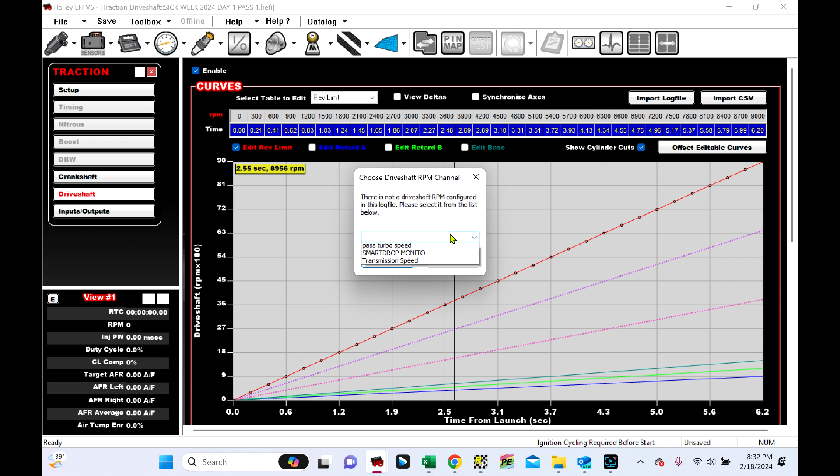Okay, go back to drive shaft, import log file, click drive shaft speed profile. Okay, now we've got a better usage of our dots.

Okay, so right now you notice the dots are highlighted, little dots here on the rev limit line. If you click up here, edit rev limit, you see the dots go away, come back. Down here is base. So we need to create a base.

So if we come over here and turn it from a pointer to a little finger, right click, and you can hit copy to base. Now I'm going to zoom in using the mouse wheel, and you see we've got little dots. That's your base.

Let's zoom back out. We'll right click, hit offset, offset to retard A. If you copy to retard A, it's just going to put retard A right on top of your base, which may be what you want to do. In this instance, I'm going to show you pretty big windows so you can see the lines easily and understand how this works. So we're going to offset this with Shift plus, let's go 50 RPM ahead.

So what that means is, let's zoom back in. Notice it is all a 50 RPM gap, right? Click edit retard A, notice there's our dot. We've got two dots on top of each other. We can synchronize axes. Now you see we've got dot, dot, dot, dot. There's a 50 RPM spread between the two of them.

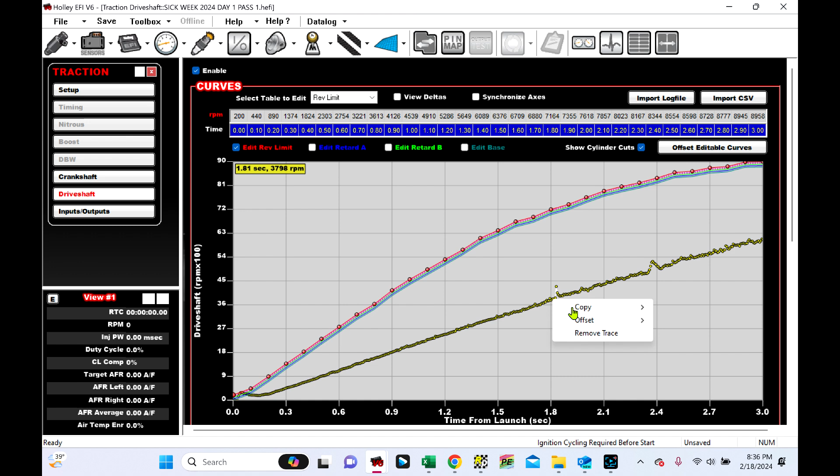Drive shaft. Now let's go import log file. Drive shaft speed profile. There we go. All right, now watch what happens. Copy this to the base. Right click, offset, retard A, Shift plus 50. Gives us a lot more resolution. Right? So it gives it a lot more resolution.

Notice we've got a lot more dots to play with in a shorter period of time. It doesn't matter how you do it, but just understand how this works. If we want to, we can right click and hit offset retard B.

We'll go shift plus 100. And then we can offset rev limiter, shift plus 200. There we go. So it's up to you how tight you want to keep these windows. Make your decisions wisely. Now we've got a lot closer dot spreads, so we can tune that in a little bit tighter if we want to.

Now let's look at what retard A and retard B do. So retard A, right now we're editing retard A. Obviously minus 30 degrees in 3 seconds would be stupid. So if this entire line was just minus 5, that means anytime the drive shaft speed goes above the baseline, it will start to remove timing as we approach this blue line. As we get to this blue line, it'll have 5 degrees out of it. Obviously, that's a pretty blanket, easy, dumb way to do things.

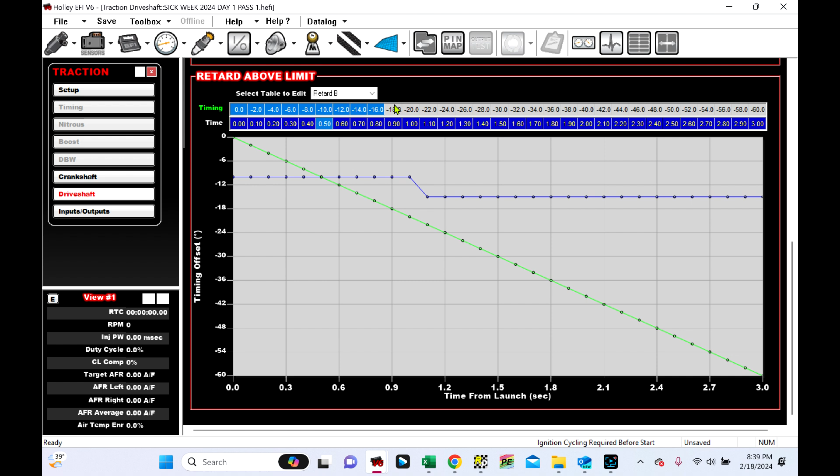So what we can do is we're in retard A still, and we can do this easily. We can copy, go to retard B, left click, hold, drag, highlight, right click and hit paste. Now they're doing the same exact thing. Now what we can do is offset selected and go minus 5, so retard B is going to pull 5 more degrees in the same time frames as retard A. Hopefully that makes sense.

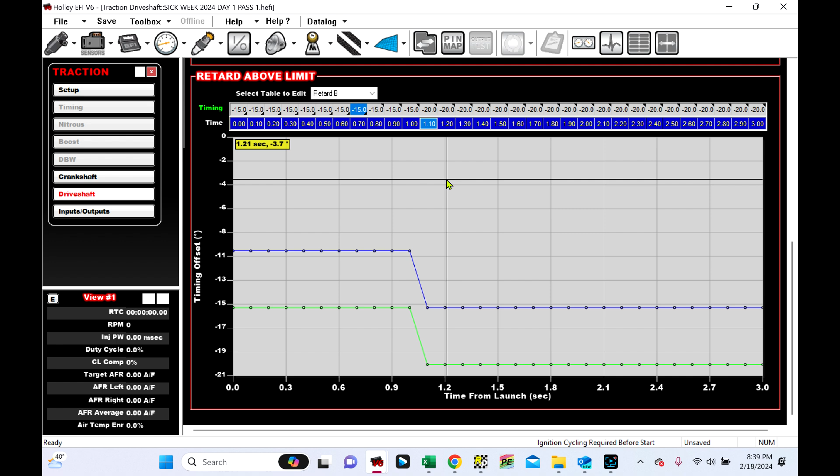That's an easy way to set this up if you're just getting your feet wet with this and not understanding it. Rough and dirty, but it works. So this is how you use Holley's traction control. Some people find it easier than Davis's, some people find it harder than Davis's, but either way, this is how you use it.

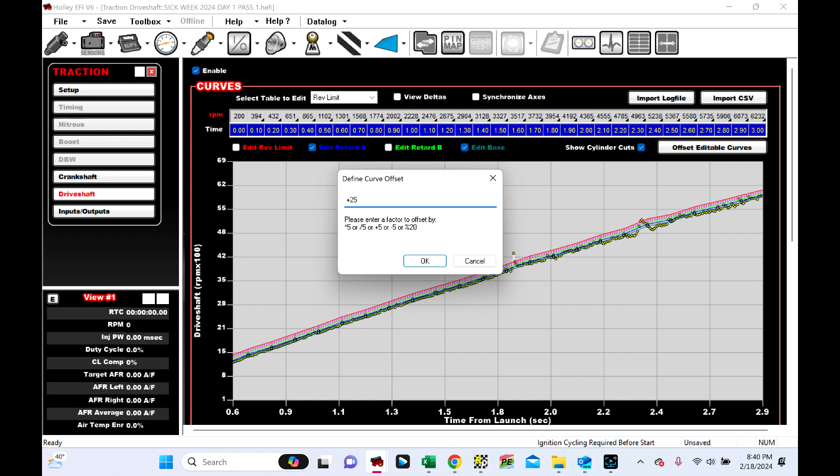Once you save this, it will save, and then you can go over here to offset editable curves and make a wholesale change to the entire thing. So you can say, I want to give it plus, let's say 25 RPM. There we go. And what it did is raise our baseline, see how our baseline's up above it now. So our baseline is up higher than it was, up by 25 RPM. So we can offset it and the whole thing moves, it moves all of them.

There's also a bunch of other options here, like show labels. So if you want to know, look right there, 3152 and 3202. If we go to retard B, it's 3227. If we go to rev limit, it's 3327. So now you can see your spreads real easy right there.

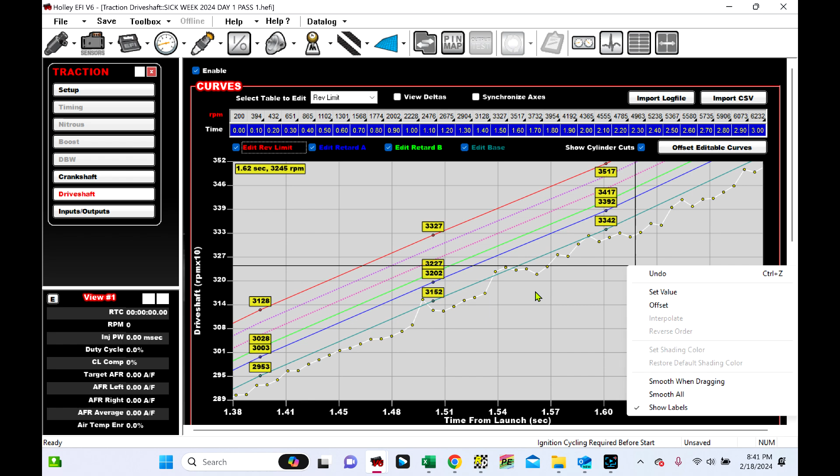You can also smooth when dragging, smooth it, whatever you want to do. You guys play with this and you'll learn it, you'll figure it out. But this is the rough and dirty way to use Holley's traction control. So turn off labels, there you go.

It's easier to import the log file to this. It's more cumbersome to create actual good, solid run curves, in my opinion.